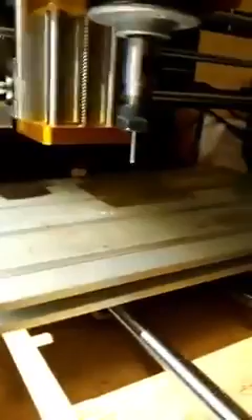Right now, what I'm going to talk about is the 3018. Okay? So, what I'm going to talk about is tramming up, leveling up your table in relationship to your x-axis, okay? Now, I really hope that my thing is working tonight. Okay. For some reason, let me see here.

I don't know what it is with my z-axis. Okay, well, I'm just going to make believe it is working. Okay? And what I'm going to do is this.

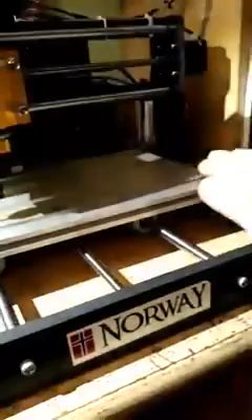Watch. When you're having problems with, for example, let's say it's carving really deep on this side. Let me get some light on here. Let's say it's carving really deep on this side and it gets lighter and lighter and it doesn't carve hardly anything over here. Okay? So, in other words, this table is cocked this way. It's like this. It's higher up here. The distance between here and this table is less than this here. So as this is going across, it's going up, making the cut shallower.

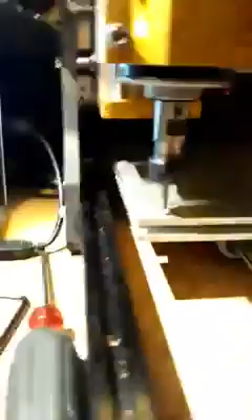Okay? Now, this is the way I tell people how to do it. And you want to bring your... Okay, now I can't bring it much closer because I have a limit switch there. Let me see. Okay, that's as close as I can get it. And then I bring it right up to the edge of my table. Okay, so now what I do is,

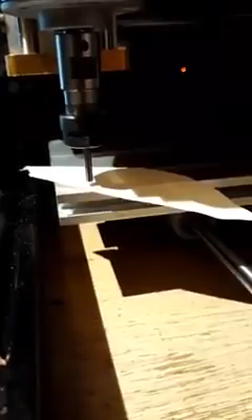now I'm using my hand right now, but if you were using your machine, I would say using a piece of paper like I taught you, okay? You keep moving the piece of paper the whole time, and first you bring it down with 1 millimeter movements, and then once you start getting close, you change your increment to 1/10 of a millimeter, and once you start getting really close, then you go down to 1/100th of a millimeter, and you creep right up on it until that paper just stops.

Okay? Once it stops, then what you do is you put your increment to 1 millimeter. And you go up on your z-axis 1 millimeter. So now my machine is 1 millimeter above where I just touched off. Okay? So now what I do is I bring my machine over. Let me see.

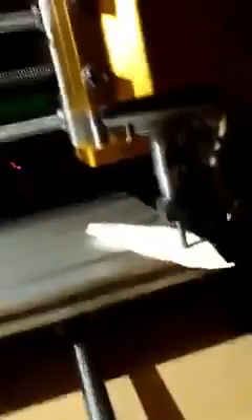Okay? So now, by moving our paper, I start clicking down, down, down, and let's say I've clicked 10 times and my paper is still moving. Well, duh, it's because this side of the table is lower. So you're going to click at least 10 times, and you have to keep count. So now, let's say I've clicked down 10 times and I'm still way off.

So now I keep clicking down, clicking down, and I find out that I have to click down 11 times more. Okay, so I've clicked a total of 21 times. That means I am 1.1 millimeter off. You understand that? Okay, I'm going to show you.

Where is my pencil? I just hate why I can't keep track of anything in here. I lose things all the time. Okay, let me see if this one works. Okay, all right, let's see if this works here.

Now, we're gonna say that this is our table, okay? And this was our tool. And I forgot to tell you what I did. I just took a tool upside down and I put the cutting flutes up in there, and I'm using the bottom of the shank as a probe, okay? That is my indicator. I do not want to use a sharp tool on my bed. This is the dull back end of the tool. It's nice and smooth, and right now everything is locked right down.

All right, now what I did was, here's my probe. And I touched it off on my table, right down here, which is 0. And then I took it up 1 millimeter. So now this gap here is 1 millimeter. Kabish? Then I moved my whole axis over to the other side of my table.

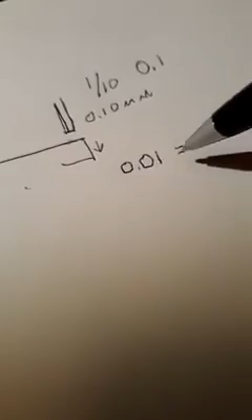So now, I put my jog, my increment, on 0.01. Okay? And I put my piece of paper in there, and we know that this table here is lower. So we know that we're going to have to hit 1/10 of a millimeter. We're going to have to go down at least that. So that is 10 of these. 10 of these equals 0.1. So just like pennies and dimes. There's no difference. So when we have this in 1/100th, in pennies, 1/100th of a millimeter, and we go down 10 times, that puts us exactly where we were right here. Okay?

So we went up 1/10 of a millimeter here. Or I'm sorry, my bad. We went up 1 millimeter here. So if we have 1/10 of a millimeter selected in our increment, 10 of these are equal to 1 millimeter. And 10 of these are equal to 1/10 of a millimeter. So, first thing we do, we put it in 1/10 of a millimeter, because we want to go down 1 millimeter. So we have to go 10 times. So first you click down 10 times. Okay? Now you should still be above because your table is lower here.

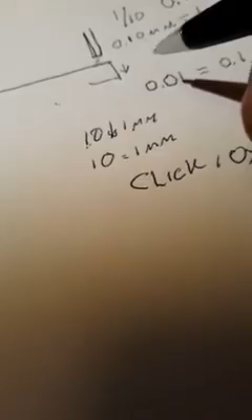Now, that distance there, let's say you still have to keep clicking 0.1 millimeters. You keep clicking down. And we found out that we had to click a total 10 times first to go down 1 millimeter. Plus, we had to click 10 more times. Now, I'm exaggerating here, okay? We had to click 10 more times, which equals 1 millimeter. Then we clicked one time, and our paper was caught underneath the tool, the shank. So you are 1 millimeter and 1/10 millimeter off. So you're too low that much.

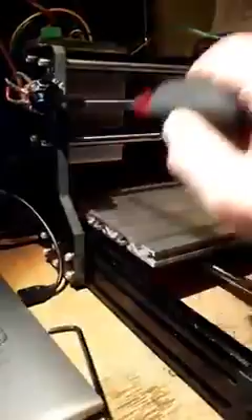Now there's two ways to fix it. And in 99% of the cases, there will be enough play to do it without any hassle. Here, this is your gantry. You got 6 screws here. The first thing I would do, the side that is high, this side here is high, okay? So, just a second. Get this out of the way a little bit.

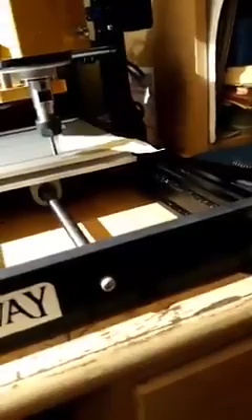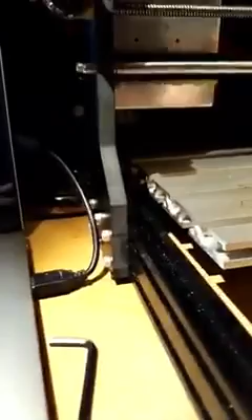Okay, so since this side here is obviously too high because it's cutting shallow, and you are too high 1.1 millimeters, then what you do is you loosen up all 6 of these screws and you try to push that gantry down, and you hold it down as you tighten up the screws. And there is enough play between pushing this side down and tightening it up, and then you check everything again and you double check it. Make sure and use the smaller increments. Creep up on that 0 point so you are 100% accurate. If you are off, it will show up on every project you do.

And especially if you are doing an acrylic engraving where you're only going 0.5 millimeter deep, if you are off a little bit, it will show up very clearly. I'm going to tell you one thing. That machine of yours should be within 0.05 of a millimeter. That's how close your machine should be. The difference should not be any more than that. And to be honest with you, it actually should be that. This is how accurate your machine is. I mean, we're splitting hairs here, way down. But if your machine is off, every project you do will be off.

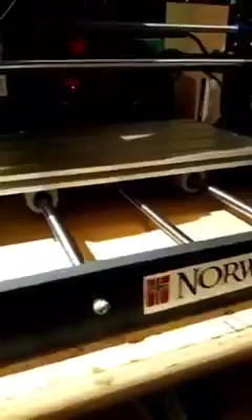You just know where you're at, keep track of all the numbers, all the clicks, and you'll always know where your spindle is at in relationship to the table. So let's say you are 1/10 millimeter off after you adjusted that side there. Then what you can do is bring your tool down again with your piece of paper and touch it off, okay? There, my paper is stuck.

After you've measured several times, because you cannot do it one time. When you tram up your table, you will do this measurement from here to here at least 10 times. This is not just wham, bam, thank you, ma'am. It is not like that. You have to keep going back and forth, maybe readjusting, back and forth. It sounds very tedious, and yes, it is. But if you want to achieve accuracy, your machine should be set up accurately.

So now, I got my paper underneath here, and I found out I am 1/10 of a millimeter off. So what I can do is bring this up 1/10 of a millimeter. No, what I would have to do is lift up my gantry and bring my spindle down 1/10 of a millimeter. I'm just saying that we were off.

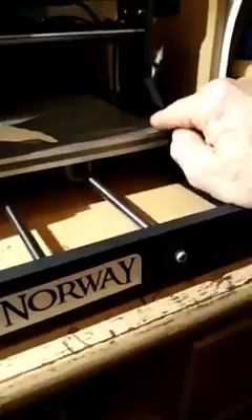Now, let's say when we measured here, we measured 0. When we got over here, this was still 1/10 of a millimeter lower, so there was air when it got over here. In other words, we've adjusted this all the way down as far as we can go, so we still need to go up here. So what you do is loosen up your screws here, and when this is at 0 on your machine right here, it's right there.

What I do then is loosen these up and push this gantry up, so that you will see air underneath your tool. When you've pushed it up enough to see air underneath your tool, then you go down the 1/10 of a millimeter you were off, and then you carefully bring your gantry down. You just tap it down really, really carefully.

And I'll tell you, don't loosen the screws all the way. If it's just hanging there, you don't want that. You want it kind of solid but loose. Then you can just tap it, either with your finger or something. Once you loosened it up and pushed it up, then you brought your Z-axis down 1/10 of a millimeter. Now we start tapping down here until our paper gets caught.

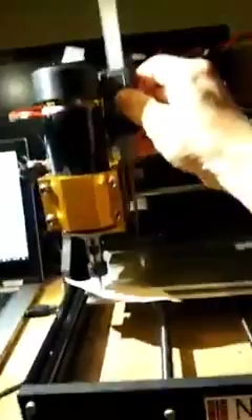Use your jog buttons and your intervals. They are your troubleshooting masters. Let the machine work for you. There are other ways, but I'm not going to go into it now. I can show you really quick. Another way you can measure is by doing this: you can measure from your spindle bracket to your table, like that. But you have to find a very good place to measure. You can use your calipers.

When you have measured, let me just move this over a little bit and I'll show you what I mean. It's easier to show you here. I'm just trying to find a good place to show you and explain it at the same time. I'm going to move my thing over just a little bit more. There. When you find a corner that you are going to use, like right there, always use the same exact corner.

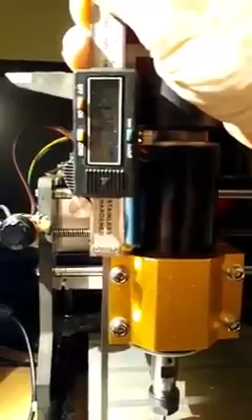So right now, I have touched off right there and I am touching down on there. My calipers are perfectly in line, straight, and it is 129.45 millimeters. Now, what do I do now? Watch this. I zero it out.

So now, if I move my x-axis all the way over here, I can measure using the same exact place again over here. And since I zeroed it out, guess what? Any difference will show up on your calipers.

So, that's how you use calipers to measure stuff like that. You can measure here. If you're wondering about your x-axis moving, you can go in here and measure from your gantry to the side of your machine. And then zero it out. And then move it 10 millimeters and just remeasure, and it'll tell you if it's moving exactly 10 millimeters or not. Okay, that's how you use your calipers.

All right. Now, we talked about the 3018. Okay. And I was using LaserGRBL just to do the jogging because Easel was down. All right. Now, what we are going to do today is what we decided on last night, is how to find things on the internet. How to find things on the internet. Okay.

Open up Google Chrome browser. Okay. So, Google search. Okay, now we're in Google search. And in here, I put free. First word. Oh, let me get rid of all that. Free. Black. And white. Clip art. Okay. There we go. Free black and white clip art.

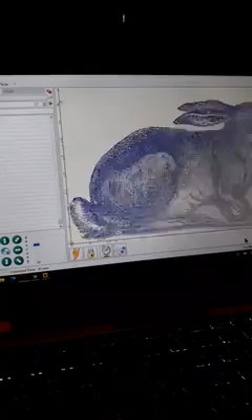Okay? So that is how you search for things. You just have to use the correct terminology when you're in Google search. And also, if I say next, and I just say create for the heck of it, let's see what it looks like. Oh yeah, nice image. There's things you see here, but this does not get printed, I can tell you that. It does not get burned. Okay?

So, we have talked about finding images. Go to Google search, put in free black and white clip art images and then whatever you want. Okay? Let's say sailboats. Okay? Wow. There you go. And I'll bet you they have some really cool ones like this one here. Let's see more images.

That wasn't a sailboat there. Somebody got their ducks. There's some pretty cool ones. Let's see here. I've seen some really beautiful images of the old sailing ships, like these here. Look at this. Okay. You can do some cool things with these images, really.

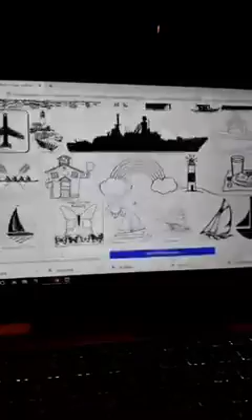Okay, and like I said, you can just scroll and scroll and scroll until you're blue in the face. Let's look for, let's see, New Year's Eve. Let's see what comes up like that. It's just trying things. There you go. There you go. Clip art to your heart's content. Okay?

I was thinking tonight I'm also going to throw in something a little bit different. Something I haven't done any of with you. How about if I show you some 3D printing? I'm going to show you some 3D printing, which is very, very cool. And it just so happens I have a 3D printer here. Let me get it hooked up here. Unplug my 3018, and I plug in my 3D printer. Okay. And I turn my printer on. And it is not plugged in.

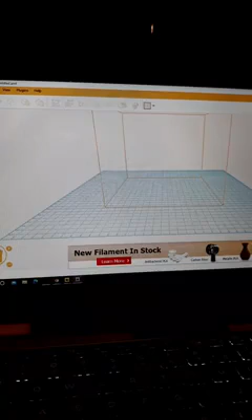But I'm going to just show you what it's about. My printer is a DaVinci Junior 1.0 Pro, made by XYZ Printing. Okay. Just 1 second here. Obviously, it's a long time since I've used it. Now, we're just going to forget that. Now, File. Just like any other file program.

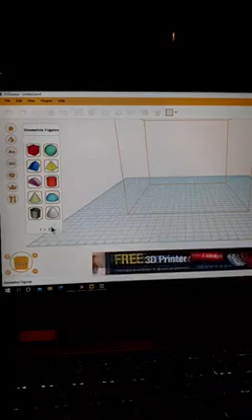Okay? They have shapes here. They have shapes, letters, and stuff like that, okay? And those are recently used ones. They have shapes, and there's more shapes. If I want to just bring a shape out, I click right there, okay? And then what I can do is highlight it. And over here, it tells me all the properties. Let me see if I can move this window over. Yeah, I can do that. Good, much easier.

So here, I have properties. This is the position it's in right now. That's where it's at. Okay, if I move it, you see the position changes, okay?

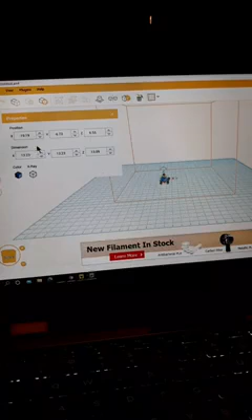So that's in position there. Now dimensions, I can go bigger and bigger and bigger. Now, remember the lock. You always have to remember these locks. If it's locked, it's going to keep the proportion. So when I increase X, it's going to increase Y. Okay? And you see that image getting bigger and bigger.

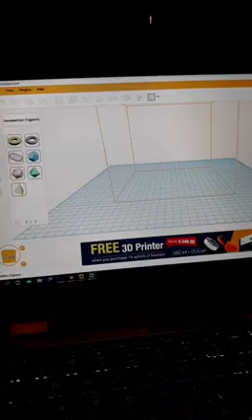Okay? Now, what I want to do is I want to land it. In other words, there. It is sitting on the platform, on the table. But what I'm going to do is get rid of that one, and I'm going to show you, grab another one, just a ball. Let's see. Grab a ball. Boom. And I'll land it right away.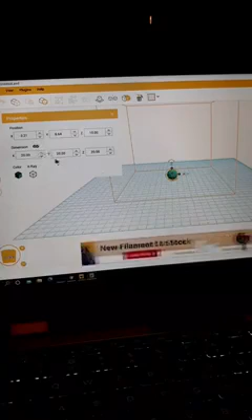And then I lock the dimensions, so now I can go bigger with it. And since I go bigger, you can see it's going down into the table. So I land it again. And I'll tell you, you can play with these, and it is really, really cool. Now, let's just say I want a hole right through that. Or either way, doesn't matter.

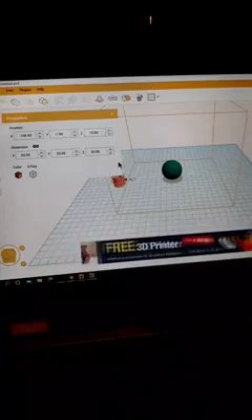Okay? Let's say I take a cylinder, and I bring a cylinder out here. Now, let's say I want to rotate it. I got to move this out a little bit, out of the way. And I'm going to zoom in here and try to show you. Here you have rotate in Y. I can rotate it 90 degrees exactly, right there. I can rotate it in X also, however I want.

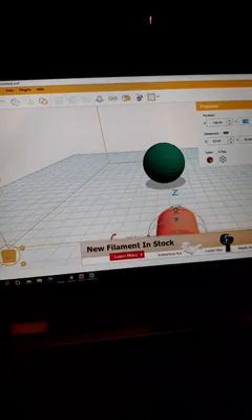Now, when I start looking around here, first I see that this is not lined up with my circle. So I want to see the position in Y. Right now it is 8.64. This one here, I highlighted this. This is Y. Let me see. Y 8.64 should be the center there, and then let me turn you around, and let me move you in X. So I can just move this in.

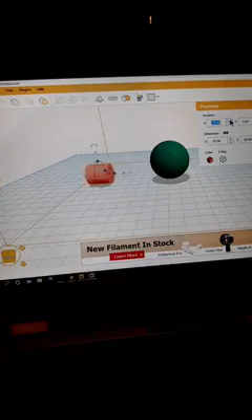Now what I want to do is make this a little bit smaller. I want to make it 10 millimeters. And I want to make it longer, and that way I go in X. How did I do that? I used to be able to sit with this and, without even thinking about it, make it bigger and smaller. Okay, position. Let me see something here.

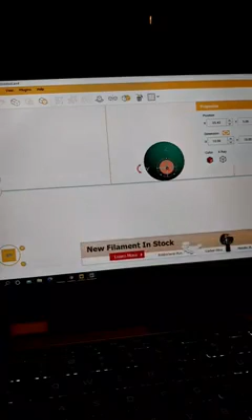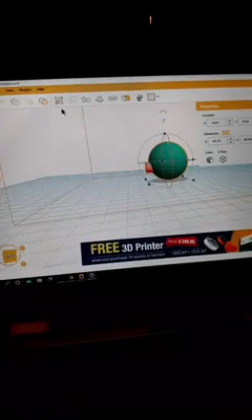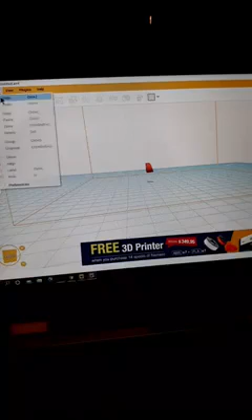When I look at it like this, I can move it in my position. Okay, and right there, let me see if it is. Here we go. Hole. Oops. Edit. Undo. I did it in the wrong sequence. Hole. There we go. So I just made a hole. It's kind of hard to see, but there is a hole there, right there.

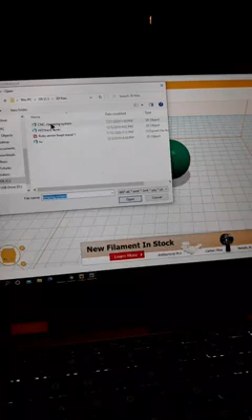And then when you're done with this, let's just say I want to print it. It's this simple. Okay, now watch this. I'm going to show you some other things. Open. Don't save. Here's a clamping system that I just did, right here. Very simple. And the cool thing about these is, I'm going to show you something really cool.

If you have a 3D printer, you want to go to Thingiverse, right here. Now watch this. This is really, really cool. Here we are at Thingiverse. Now, let's say, for example, I want a box to put my Arduino board in. So I say Arduino case. Enter.

Okay. There's other things that came up. This is a fully 3D printable wind-up car gift. Right here, Arduino Uno snug case. Arduino bumper. 3D printer case for Arduino. These are all cases, all different things. There are so many cool things. Look at this. I can go more. Let's see, what do we want? Santa. Let's see what Santa comes up with.

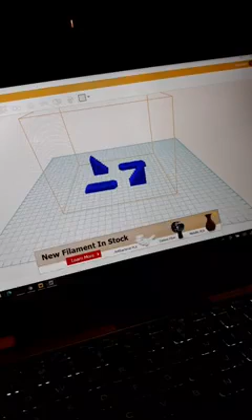And now I have to go into my folders, and I have to go to my downloads. I go to my downloads and I right click on Santa Girl because it is zipped. I right click on it and I go right down here and I say open. Where does it say extract here? Okay, and now I'm going to get one more file up. There we go, Santa Girl. And that is in my downloads.

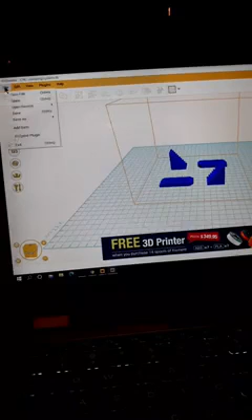All right, now watch this. I'm going to say File, New, boom, File, Open. Okay, and I got to go to Downloads, and I go to Santa Girl, and I go to Files, and I click on AA. So let's see what happens. Let's see if I get a Santa Girl.

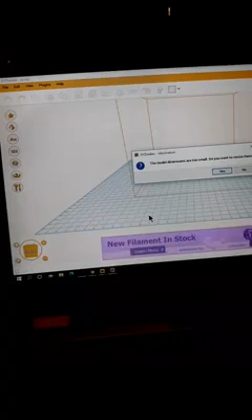I think it's a pretty big program, but as we are waiting, okay. The model dimensions are too... You want to resize them? Yes. Okay. Now,

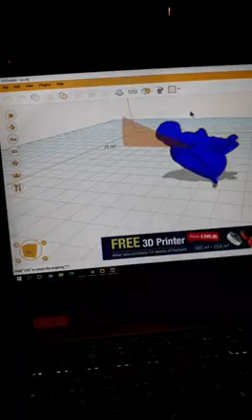so the first thing I'm going to do is I would like to rotate her. Move this away a little bit, and I want to rotate her in Y. Okay? And I start rotating, and I look for 90 degrees. Oops. 90 degrees right there. Now, what I do is I say I want to land it. There. So now she is ready to be printed.

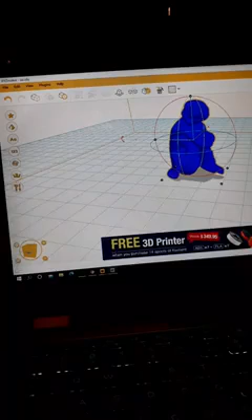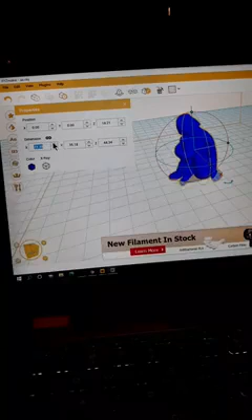Let me turn her around. This is a big file, let me tell you. Let's see here. Now, click on her again. Now what I'm going to do is I'm going to make her bigger, because right now she is only 18 millimeters. See, 18. I'm going to lock the proportion and I'm going to make her bigger. Boy, this program is slow.

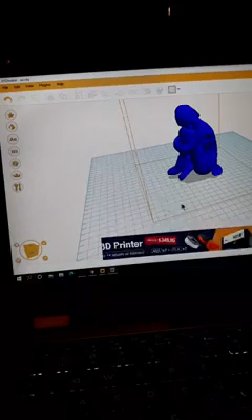Okay, I could just have gone in here and said 60. There. Okay, now I move this away a little bit, and I land her again. There. So now I am ready to send this to my printer. You see, she's sitting on the back of her butt here, and her dress is hanging down, so it's good support there.

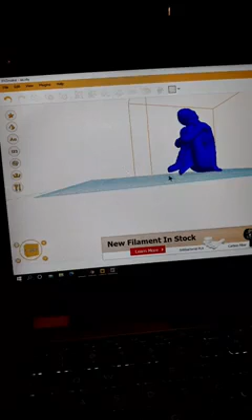Now, let's just say I wanted to print this. So I go to File, and I say XYZ Print Plugin. Watch. Okay, here we go.

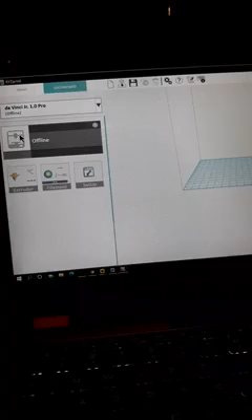You know, babe, my printer's dead. I'll bet it's the power supply. As we are waiting for the print window to open, hello? Oh, finally. I got to do another cleaning on my computer. My computer is getting so slow. Jessica, what other formats would be able to save as besides JPEG?

PNG. Well, you can bring them into Inkscape, and then you can export them as PNG.

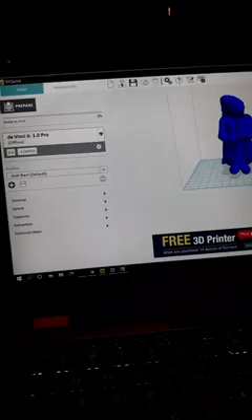Okay, don't need that. It's loading the model, and it's going to take a bit. There we go. Problem found with the model: we detected a hole in your model's mesh, may affect your print quality. Okay, no problem, I don't care. I've seen that a lot. And there is my girl, and that's what she's going to look like when I print her.

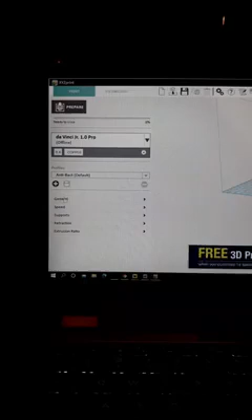Now, I'm going to show you some of the things that you have to do. First of all, this is my printer here. It's offline because my printer is off. I think my power supply has died. So, I start down here, and the filament I'm using is PLA.

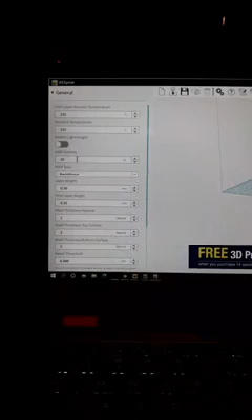Okay, now I go down here to General. These are my general settings. This is my feed rate. First layer nozzle, oh, I'm sorry, my temperature. My first layer nozzle temperature is 210. Nozzle temperature for the rest is 210. Infill density, I say 10%. That means that only 10% density will be filled in there. If I go up to 100%, it will be a solid girl. But I don't want to waste all my filament filling her up inside where you don't even see.

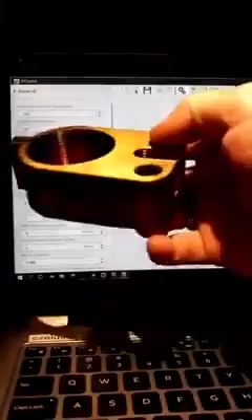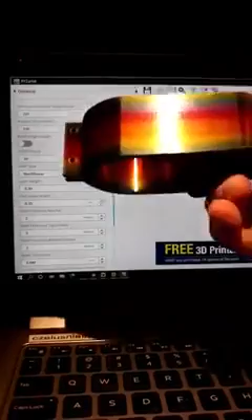Now, when I printed this bracket here for the Z-axis big motor, okay? This is printed solid. This takes a lot of filament, okay? And this is what they call multicolor filament. It changes color as you're printing, okay? Metallic, too.

So, I'm going to use 10% infill. Infill type, rectilinear. I mean, in here, they'll tell you everything you want to know. You put your mouse over things, and it's self-explanatory.

Okay, layer height, 0.3 millimeters. First layer height, 0.35 millimeters. Shell thickness, normal, 2 millimeters. Shell thickness, top surface, 3 millimeters. Shell thickness, bottom surface. So these here, the only ones I mess with are just up here, really. I don't even mess with these. You can if you want, but I get beautiful prints every time.

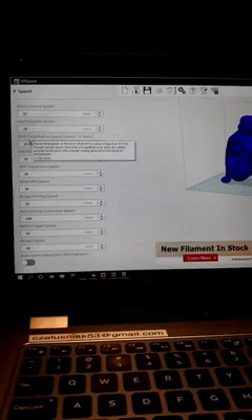Now here's my speed. Here's my normal speed, 30 millimeters per second. Not minutes, per second. So it's pretty fast. And that's shell normal speed. Shell surface speed. Okay, and then each one of these, it tells me what it does. So my retract speed, all that. So I got my speed, that's what I want, right there.

I want supports because her feet are up in the air. And if you start printing up in the air, it's going to fall down, okay? So you have to have supports. So I say supports. Support type, rectangular. Support density, 15%. Overhang threshold. Anything that's hanging over 45 degrees, it will start making support for it. Okay? And here we go. Enable supports.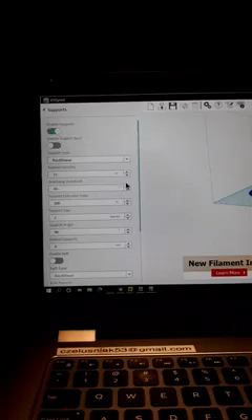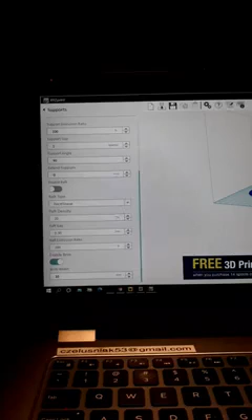Okay? So then I go here, and also with speed, let me see, supports, I forgot down here. I use a brim, a 10 millimeter brim, which makes a skirt around the bottom, which adheres it to the table better. So now I have basically set up everything I need.

Extrusion rate, retraction here. There's more things you can adjust. This is nozzle lifting for retraction, add extra filament after travel, retraction, blah, blah, blah. You'll find out later if you get a 3D printer. And here, extrusion ratio, 100%, boom, that's it. So when I go in, all I do is I go to general, set up my temperature, infill density, and just kind of look at, maybe I want thicker bottom, I can adjust it. But then I go into my speed, I set my speeds, and basically that's it.

And then I go down here to supports, and normally I don't use them unless it's hanging stuff like her feet, then I have to use supports. But I always use a brim to hold it. And then I'm basically done, okay? And I say prepare. Now that's going to take a little while for it to prepare. And you'll see the supports and everything. And the supports, the way they're printed, they're very, very easy to break off. You just break them off with your fingers.

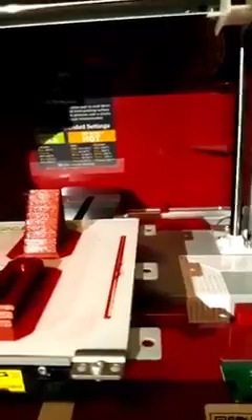And I cannot find my spatula, which I need. Where is my spatula? Let me see if I can find my spatula.

Anyways, what I do is I stick my spatula up underneath right there, just like that. Okay? And then I just take something like this and I just whack it. There we go. That is a piece that has just come off my machine. That was just printed as we spoke. And you see all this fuzz and stuff? That's something that happens once in a while, and it's that quick to get rid of. So this is a block that I can use. Get rid of all this.

Boy, Buffy just loves finding all this fuzz around. Let me tell you.

But, you see there? And then what I do is, remember, this is the skirt that helped it hold. Now watch this.

One-handed. There you go. No skirt no more. There's my piece. Pretty darn cool. Now, this piece will go exactly into that piece. Okay? And the way these work is you have a screw going through here to tighten it down, and then you see it's got the opposite there. So it just rests on there, and then you tighten the screw down, and it will hold down your piece. Like that. Okay? These are pretty cool. And you can print them out.

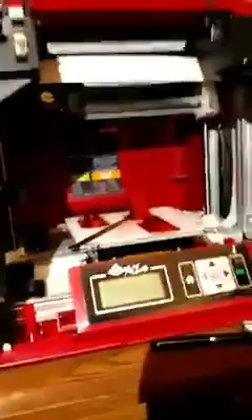These are basically the same kind of blocks that we use in the real CNC world. They look exactly the same. There's no difference whatsoever. But the ones that we use are bigger, and they're made out of metal. Okay? So this is just to give you an idea of 3D printing. 3D printers are very cool.

But do your homework before you buy one, because there's, for example, this one here. I use XYZ Maker. That was a drawing program. Now, I have two nozzles. The 0.3 millimeter nozzle is optional, which I have. Now, PLA, open filament. That one right there. This is because it is the Pro model.

You see that spool right here? That is where you hang a spool of filament that this company here, XYZ Printing, sells. They sell filament that you put in the machine. Okay, now I have my spool back there. I printed out my spool holder, screwed it to the wall, and my filament goes down and comes in through the back of the machine. I can use any filament I want, as long as it is open filament.

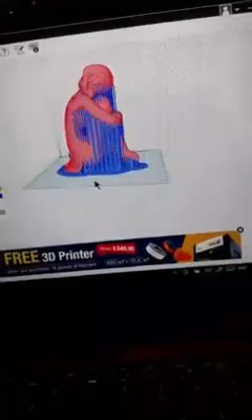Here they are showing you what that girl is going to look like when she comes out of my printer. You see, these here are paper thin walls that are just supporting different areas. All these areas are hanging more than 45 degrees. Okay? So the program is putting supports in there. And remember her feet? Right there you can see all the supports underneath her feet. Okay? And all this happens automatically.

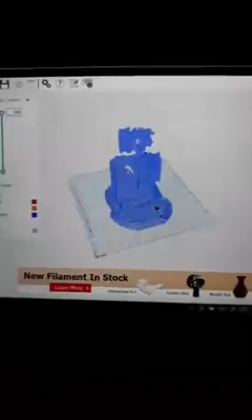It's all magic. After I printed her out, I just go and break off all this blue stuff. Okay? I can actually take it away. You see, and now I put it back again. I can take away her. That's the shell. Now what we're looking at here is the infill. I can take away the infill. Now you're just looking at the supports. Pretty cool, huh? That is just the supports there. And the brim, the 10 millimeter brim.

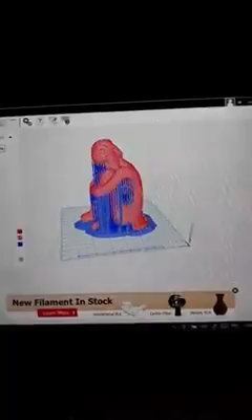So now I can look at my infill again, and then my shell, my outer shell. And there she is. And these prints, let me tell you, they come out dead accurate. These are just some that I play around with. Okay, this is one here.

I have printed stuff from SolidWorks. This is something my cousin designed in SolidWorks. It is a rope. It's for hanging fenders on a bigger boat. And you use this to adjust your fenders up and down. And this here is a mechanical drawing that he designed. And this here is supposed to be spring-loaded. And you have a button.

Actually, you have a button here that you push in that pushes this away. And the rope goes right through here. Okay, so that locks the rope. And then you push the button and it pushes this away and lets the rope move freely. And then you let go of the button and it locks. Really, really cool. And my cousin designed this and I printed it out and it is dead on. I mean, it is exactly.

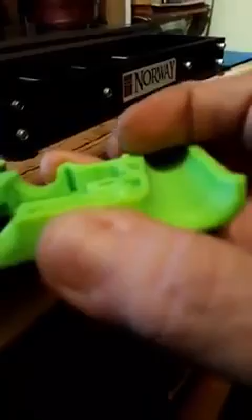I mean, here, even when I print it out, you see these guide pins here and here? When I put this on in here, look at that. That is a perfect thing. Okay? And that was from a SolidWorks mechanical drawing.

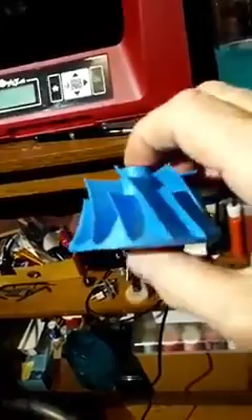Okay? I print out things like, for example, cleats for my kayaks. I want ropes for putting a little anchor, because I fish a lot, so I wanted a cleat, so I printed out cleats. Here is a turbine that I have printed out. This is what a turbine looks like. Okay? Here's a horse or a unicorn that I printed out for my granddaughter, but she dropped it and broke the legs off, so I have to glue those back on. Okay?

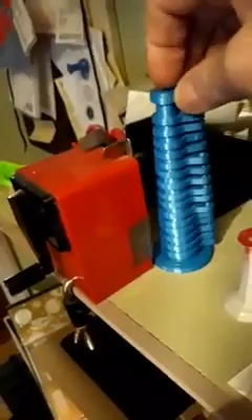I have an HO railroad setup, and I've been printing out houses. Okay? And this is one of the uglier ones. Oh, you should see some of the ones that I have printed out. But I mean, here are gears that I printed out. I do silver work, rings, necklaces, stuff like that. And I wanted ring sizers. I wanted to be able to measure rings and measure people's fingers. So guess what? I just printed them out. I'll tell you, you can print out anything you want.

Here's chess pieces. And then here's some chess pieces that I actually made myself out of wood. This is the castle. And then this is a king. These are cut out in 3D by hand. So, there's a lot of, I mean, here, screw ups. Oh no, that one was for something else. Oh, that was for a Dremel. And this here is to put on a Dremel and to sharpen drill bits.

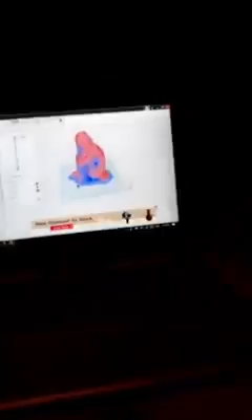Mickey Mouse thing. Here is a submarine that I printed out. I mean, there's a lot of stuff I got here just laying around. But 3D printing is a lot of fun. It's a lot of fun. And you don't have to be that savvy about it.

Now, look at this. Here, I will use 29.544 meters of filament. In other words, basically 30 yards, almost 30 yards of filament. And this print will take 6 hours and 30 minutes and 35 seconds. Okay? So, if my printer had been working, I could have started it now. And these here, you can let them go.

Well, let me tell you, one time, Buffy just gave me a weird look from out there because I did let it go one time. Well, a lot of times I let it go overnight. And let me tell you what happened. What was it that happened? But anyways, what it ended up doing was for like 5 hours, it just fed filament out, and it was all right here. I mean, it was out into the living room. When we came out in the morning, the dog was laying in her bed, and she was looking at that filament like, my God, this stuff is going to come and get me.

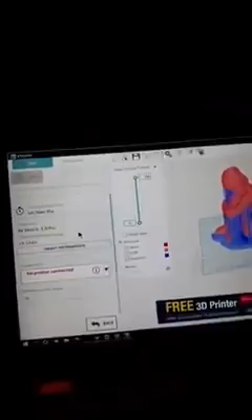So, I didn't want to cut it because it was still attached and it was not used. It had just been fed out. And so I had to wind up that whole thing, it was a rat's nest here. So, yes, shit does happen with 3D printers too. No matter what machine you have, as long as it's kind of modern technology, guess what? You're going to have faults.

For Christmas, my daughter gave us a very, very cool night light for the bedroom. Oh man, let me tell you what. That thing is a laser. It's a 5-watt laser, and the lens on it is kind of like half a ball. So it lights up the walls and the ceiling and everything. And there are laser stars that move. And it has the nebula and all that moves around. And it changes color real slow, and it moves as it's changing color. Like the nebula. I mean, gorgeous colors.

And then you have all these stars that are moving at different intensities and everything. And then you have shooting stars in there, and you have UFOs that'll appear and then go down really quick, and then just disappear. Very, very, very cool. And we've been turning it on at night when we go to bed and watch TV, and went to turn it on night before last.

Nada. It's a unit you set on the floor or on a table or whatever, and it's got a little power supply you plug in, and you have to control it with a remote. Okay, and I turned it on with the remote. Nothing happened. So I thought, well, it's got to be either the remote or the unit or the power supply.